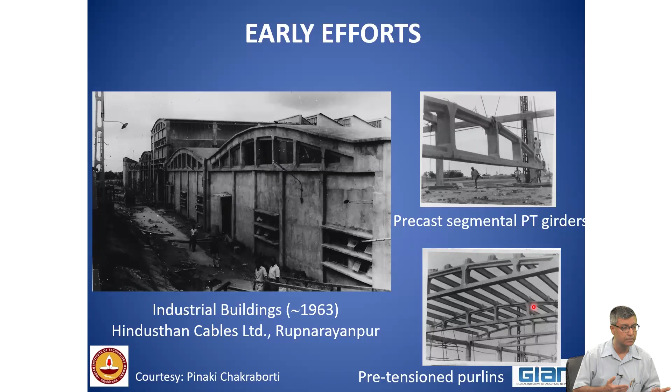Over these girders, they're providing purlins, and over the purlins, they're providing the roofing elements. When we teach civil engineering, especially structural design, we need to understand the load path. Where does the load primarily come from? For a gravity load design, it starts from the roof. Then how the load gets transferred, that means from the roof to the purlins, to the trusses, then to the columns. In fact, in your tutorial, this will be the question.

The Structural Engineering Research Center, which is in an adjacent campus to IIT Madras, also pioneered precast concrete for economically weaker section people. They have a mandate to make technology which is affordable for mass housing. These houses were near the fishing community, near the beach. Yes, it was not everything a success, because at that time there were some leakage problems.

And what happens in the fishing communities, they use a lot of water and they will wash everything, and that aggravated the deterioration of the leak proofness. Now, over the years, different sorts of chemicals and other types of caulking materials have been developed. The same thing, if it is done today, it will be done in a better way.

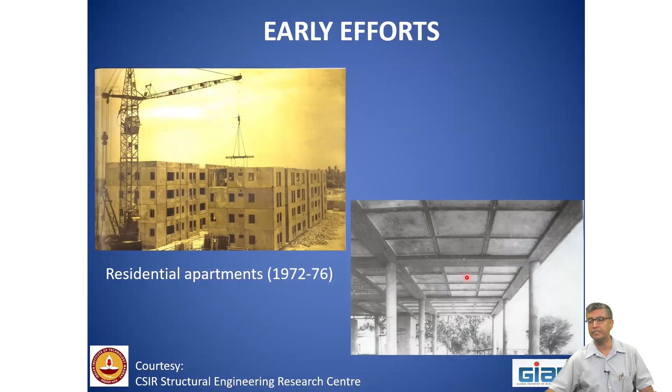Coming to the Indian pioneers, let me start with Baburao G. Shirke, who had established this company BG Shirke and Group, from where you will be having the speaker of the last day, Yogesh Kajale, one of the leading designers currently. Now, Baburao Shirke brought the technology called Siporex, and used it in mass housing. And BG Shirke has done pioneering work, not only in Mumbai, Pune, but in Gurgaon, in Chennai. I will be talking tomorrow about what the Shirke Group did in Chennai.

Shirish Patel established the firm Shirish Patel and Associates, where we had pioneering engineers like V.V. Nori. And this particular building, the Petit Hall, see the year 1973. And this building still stands in a coastal city of Mumbai. That means precast concrete can be durable, at least we are saying 50 years of lifetime.

After that, what happens is the functionality changes, the taste of the people changes, the society changes, and we don't expect buildings to be usable after 50 years. But at least for 50 years, we should guarantee that the precast building should be there without much durability issues.

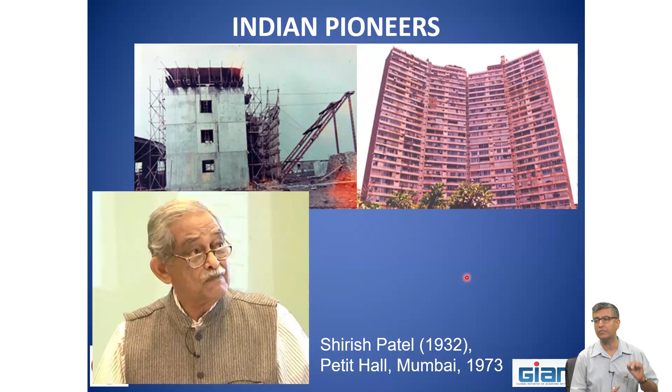Yesterday, Mr. Raghavan had mentioned about Dr. A. Ramakrishna. I was fortunate to have personal contact with him during the writing of this handbook, which he had championed. Dr. A. Ramakrishna's son, Professor Meher Prasad, is my senior colleague and a mentor.

Now, whatever you see in Larsen and Toubro today is because of a few pioneers, apart from Mr. Larsen and Mr. Toubro. And one of the Indian pioneers is Dr. Ramakrishna, and he had a single job throughout his life. What was that? L&T. They started from scratch and went on to make it the largest construction company in our country, which can compete with other international firms.

That's why I'm saying, those who are working with L&T, you are blessed to work in such a large firm, but try to have the spirit of giving back. Don't compare your salary with IT or data science type of jobs. You cannot compare. If today farmers say that I'm not getting salary, I will stop my job, who will feed us? That's why in our society we have to accept that we will be having different salaries. It cannot be uniform. The world is not a socialist platform. Let's be passionate with whatever we are doing.

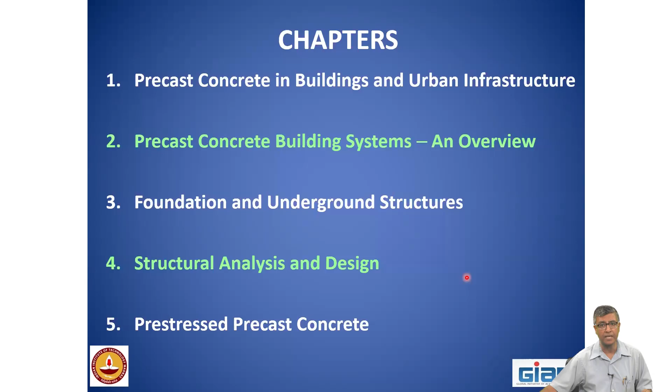Seismic design of precast structures - here also it does not teach seismic design from the basics, there are books for that. But here it's about how you can analyze a precast concrete building, that's what is covered.

The material properties are written in two chapters: one is properties of the material, another is the products. Even as academicians, you may think you don't want to meddle outside your classroom. No, please read company catalogs to understand the type of products the industry is offering, and make your students aware. The precast industry is an industrialized system, and we have to make our students aware of this.

Joints and connections, a very important chapter - we are calling Professor Jaya tomorrow to speak on this, so I will skip the details. Production, handling and erection - Professor Liberato will be talking about this.

Quality control and assurance - what are the specifics for precast concrete, I will mention that. Contracts and taxation - Mr. Raghavan has mentioned there are specialties in it, I will just briefly mention this, although in this course we are not covering them in detail.

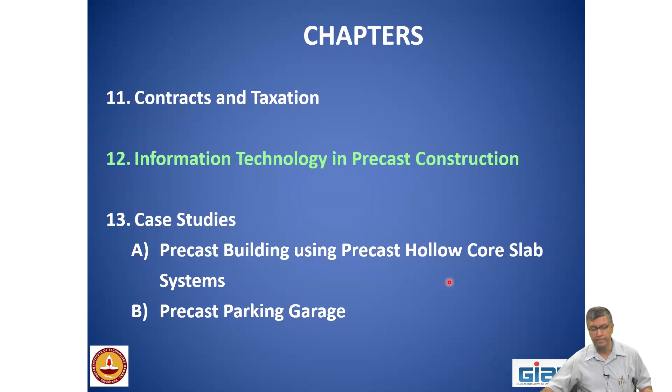And finally, there are two case studies where they have shown how the analysis was done briefly, how the construction was carried out, and what type of elements were selected. These are mentioned in these two case studies.

Now the authors: the first was written by Dr. A. Ramakrishna and Dr. Sivarama Sarma, both from L&T. The second one was written by me, which I will discuss tomorrow. The third one was written by Professor S.R. Gandhi, who retired as director of National Institute of Technology in Surat, and my colleague Professor Subhadeep Banerjee.

The fourth was written by Dr. Ramanjaneyulu, who was with Structural Engineering Research Center. The fifth one, you met him yesterday, Mr. Raghavan. The sixth one, Professor K.P. Jaya, whom you will be meeting tomorrow, and Professor Meher Prasad, my senior colleague whom I mentioned.

The chapter on joints and connections was written by Professor Jaya, and we are fortunate she will be coming. The ninth chapter on handling was written by Mr. Mohan Kumar from Rani Precast, though unfortunately he is not with us. Dr. Srinivasan from SERC wrote the chapter on quality control. Mr. Raghavan wrote the chapter on contracts and taxation. Mr. L. Chandrasekhar wrote the chapter on information technology, and Mr. Saladitya Shaha from Larsen & Toubro wrote the case studies. So whatever I'm presenting today is essentially their contribution.

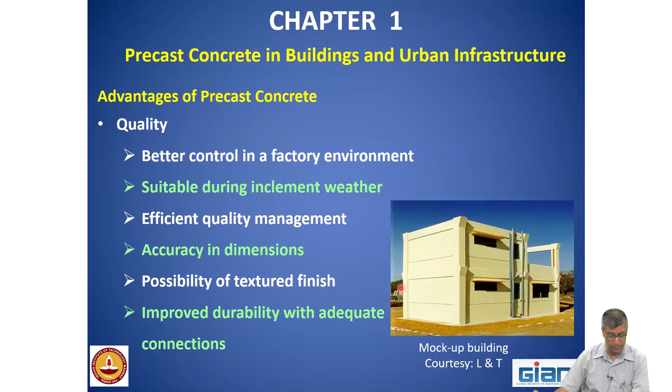The first chapter - some of these have been mentioned earlier. The way precast concrete has been promoted in this handbook is based on three main categories talked about in construction management. The first one is quality - factory-made products which can be produced even in inclement weather, efficient quality management, accuracy in dimensions, possibility of textured finish, which I will talk about tomorrow, and durability aspects. Next is time - we are talking of mass housing for our masses, and time is the premium, and precast is one of the options. Please note, I am not saying this is the only option. No way, there are other options also.

Which the government is promoting. In precast, we have rapid construction, provided we do the planning. There are certain prerequisites for the success of precast: use of mechanized ways, of course, meaning you have to purchase extruders and battery molds, suitable if it is modular and repetitive. One-off buildings are no point - no investor will be interested in that. And there can be parallel activities going on. That means when the foundation is being made, typically cast in place, at that time the superstructure elements can be produced in the factory.

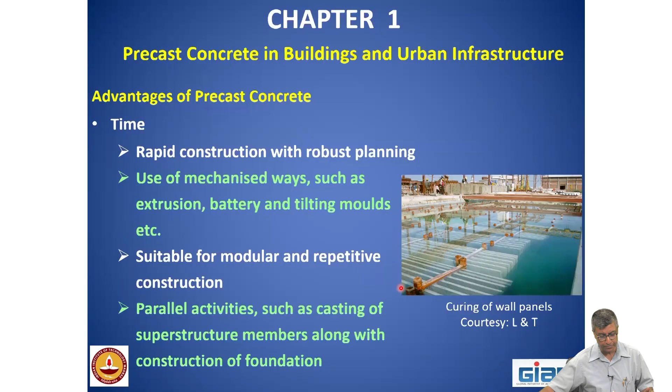Now, what are the miscellaneous advantages? Today we are talking of greener buildings. My friend and colleague Dr. Sivakumar works on the computational aspects of what is called green, and he can tell us how we can qualify the statement that precast is a greener solution than conventional cast-in-place construction.

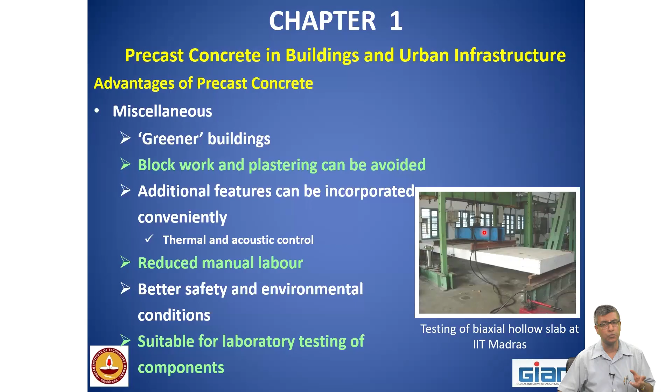Better safety and environmental conditions, and suitable for laboratory testing. This is in our lab - we tested what is called biaxial voided slabs, the proprietary name was Cobiax, a type of slab where they introduce plastic spheres to reduce the weight. I'll be talking about it tomorrow.

Now, what are the challenges? Does everything look positive? No. First is the initial high cost of setting up factories - we are talking of an industry, and hence initial investment is necessary.

Teemage, who financed it? It's the Chennai Silks.

Those type of companies have to come up to help us.

High transportation costs for delivery of precast components, given our road conditions, is a challenge. Unless we have precast factories throughout the nation, you cannot say that I will transport.

Even in our building, whichever you will be seeing, the sports complex built by Teemage, getting the products from, I think, Coimbatore, the Tirupur factory, was a challenge. And of course now they have established a factory in Kanchipuram to meet the Chennai requirements. The erection of the components needs special types of cranes, and there's the excise duty issue.

Mr. Raghavan mentioned that in our country we have a special clause which inhibits the precast manufacturers. I'll be briefly talking about that today.

And we need modular design with repeatability. That means even the architects have to be familiar with how to design for using precast concrete. They cannot come up with something and then leave it to the structural designer to figure out how to make it precast. No, yesterday Mr. Raghavan rightly said it has to be an integrated approach.

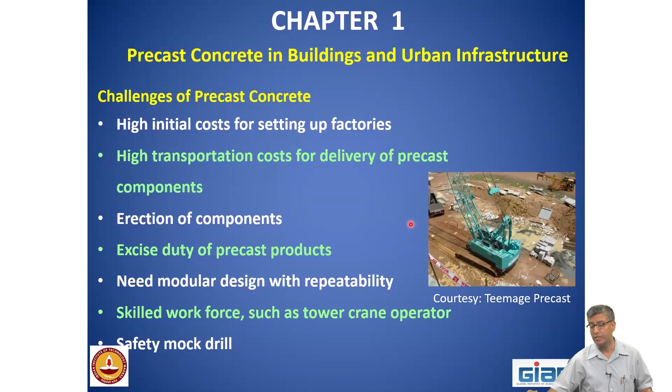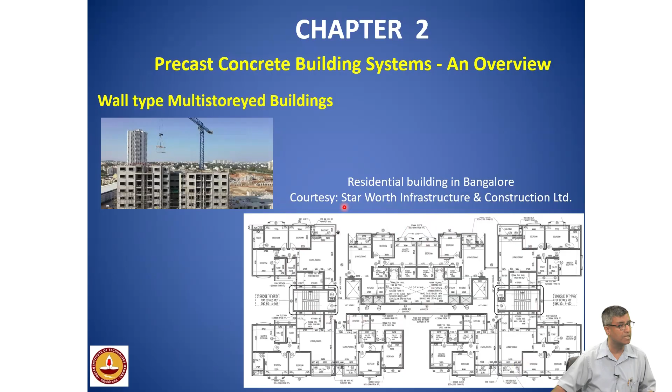Coming to the second chapter, I'm just briefly touching upon this. In this chapter we are talking primarily of two types of precast systems. The one is a wall type, where you make wall panels, maybe with window openings. You see that this particular plan, the way the architect has conceived, he or she had kept in mind this repeatability or the modular concept. That is necessary, and this is coming from a very famous company, the Star Worth Infrastructure and Construction Limited. I talked about Mr. Raj Pillai, who is involved with this.

The other type is the frame construction. Each one has their benefits and domain of usability - I will be talking about that tomorrow. In the frame construction you are having beams and columns, and accordingly your building plan is also different. However, you can also have a mixed type, that means within a frame type building you can have panel type elements.

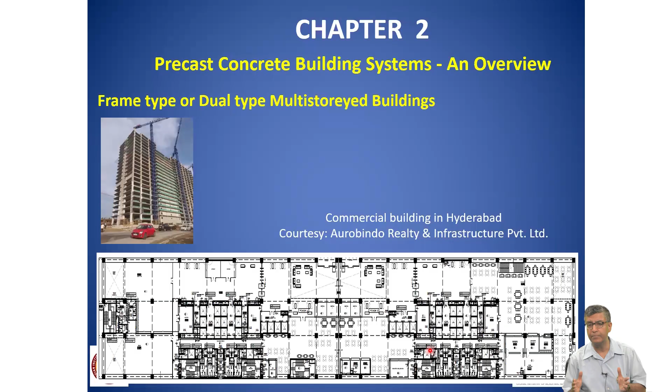The foundation and underground structures - in the foundation we have additional advantages of precast concrete. First, that we can backfill the soil very fast. In our country, we have this monsoon season in many parts, and at that time construction is invariably affected. Using precast is a solution that lets you still continuously do the construction.

Curing is not required on the site, and it is also suitable for fluctuating groundwater table. In a coastal city like Chennai, where our groundwater highly fluctuates - come December, it is almost at the ground level after the rains, and come say April or May, it is substantially below. Now these are the challenges in the construction of foundations.

You can ensure high grade and quality of the concrete. For pile construction, the bentonite slurry can be an issue regarding disposal and contamination of the concrete. That can be avoided if I am using precast piles. And there's no necking or bulging of the piles, which can happen if I am using conventional cast in place piles.

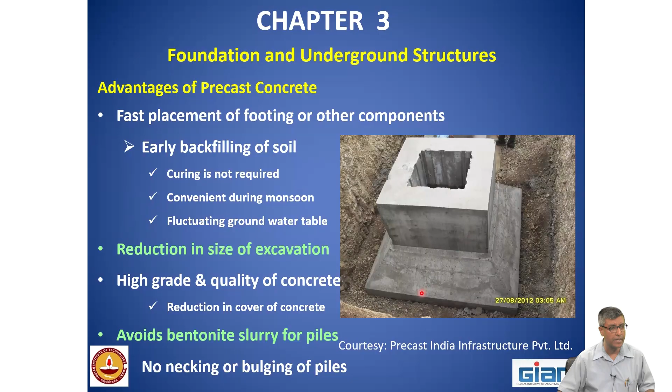This particular photograph is from Precast India Infrastructure Private Limited, Pune based, and Kapilesh Bhate, a very good friend of mine, will be coming on the last day to speak about his company. On the photograph on the left, this I had taken when I visited the factory in Tirupur, Teemage.

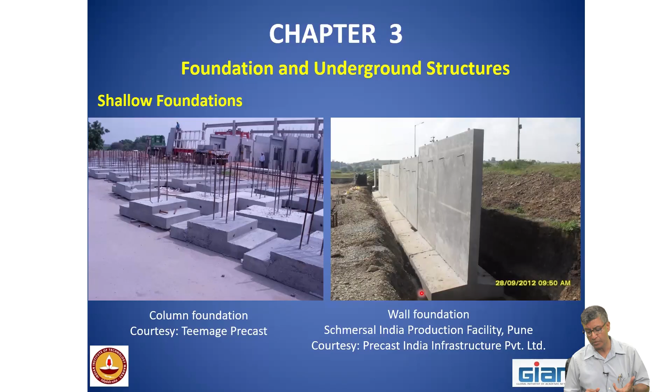That these are the way we teach foundations - shallow foundations and then deep foundations. Similarly here also in this chapter, that's the way it is written. The first is the shallow foundation, which are for columns, pad foundations, or it can be for even walls like boundary walls. And the other group is the deep foundations.

What is meant by that? Pre-tensioning, Mr. Liberato will be covering. Spun means it's like a hemispherical mold where you put the concrete, then put the cover to make a complete circle, and spin it very fast. That spinning does the compaction, so it's not like using a vibrator to compact it. This compaction provides much denser concrete, and that's why these are called pre-tensioned spun piles.

Similar technology is also used for electric poles and masts, which you will be seeing outside.

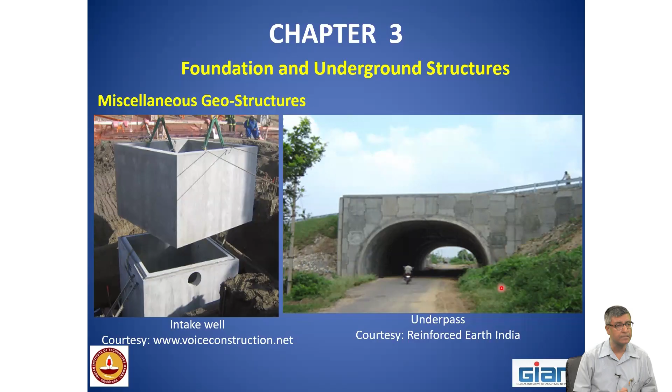These are mostly used for grade separators, and you just go outside our campus, you will see that. On the left, we see the reinforced earth wall of the Kanaka Durga temple in Vijayawada. Our retired faculty, Professor K. Rajagopal, was highly involved with this. I had got an opportunity to work with him while testing these fascia blocks, to see how you can use the geogrid anchors for these fascia blocks.

On the right side, yesterday Professor Liberato talked about these tunnel liners, and here you can see this. This is the inside of the tunnel that has been made in Chennai and similar other places.

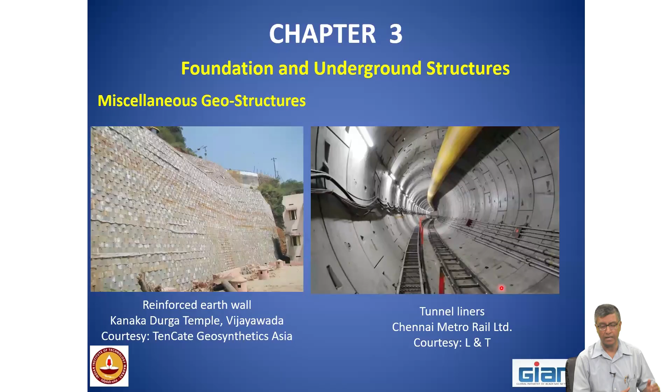We went to see the factory which is producing this. It's a pretty high-end factory, and we took our students there. Production is done by Larsen and Toubro, and it's like a huge factory with assembly line type of processing. On the left side is an overall view, and on the right side you can see the molds.

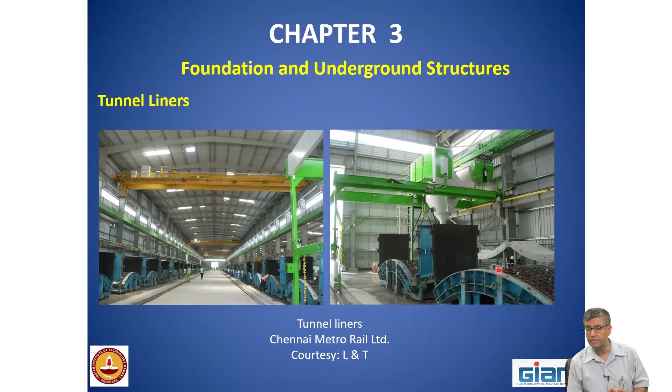Each of this can be a seminar by itself. I'm not a specialist in this; it's a very specialized area, how do you analyze the tunnel liners and then how do you design for it.

Coming to the structural analysis and design, whenever we do a building analysis using a computer, we have to be aware that we have to use appropriate finite element modeling. Otherwise, junk input will give junk output.

First, the selection of elements: frame elements for the beams and columns. Here, we are not teaching finite element method, it's just raising awareness. Membrane or shell elements for the wall panels, plate elements for the slabs, and strut elements for infill walls to measure their axial compression resistance.

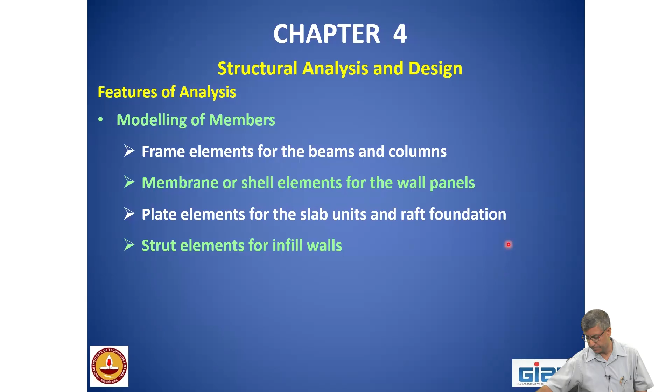Then the main challenge comes in the connections. When we teach reinforced concrete, in the first class we say, what is a frame? A frame consists of beams and columns which are rigidly connected. What is meant by rigidly connected? That the angle between the beams and columns at the junction will stay 90 degrees even under load, whether gravity or lateral. That's the way we start frames.

But my friends, in precast, this basic notion may not be there, and hence that should be taken care of in the analysis. Otherwise, things can go wrong.

Now, there are two types of joints and connections. This terminology is a bit confusing. The way I view it is, traditionally in reinforced concrete we talked about joints, beam to column joints, slab to beam joints, which are the overall junction region. But now we are moving more towards structural steel type applications, where they use the word connections, beam to column connections. So the overall junction we can call joints, but the detailing is actually connections, because we are trying to mimic the way they do it in structural steel.

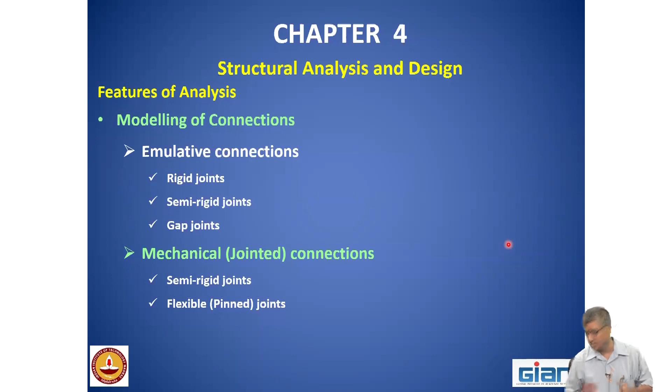Now, let's try to understand the difference in the behavior of a cast-in-place conventional versus a precast with pin connection. So on the left, if I have the gravity load and we are assuming rigid joints, how does the resistance come? Where are our BTech friends?

Today BTech friends are not there, they were sitting yesterday here. Okay, no, do not go back, you should come front. Okay, today this is empty. Okay, tell me, how does the frame resist the load? Primary load is the gravity load, which is there every second. Okay, since you're sitting back, I will not ask it.

The beam tries to bend. While it's trying to bend, due to the rigidity of the joint, it also tells to the column, hey, help me. And then the column also starts flexing. And like that, the load gets transferred gradually to the foundation.

And if you look into the bending moment diagram, the beam is trying to bend. If it is simply supported, it will just bend with positive bending, since gravity load is always downwards. But due to the rigidity of the connection, we tend to have hogging moment coming up near the beam column joints, and that due to joint equilibrium gets transferred to the columns. And this is the bending moment diagram. I will ask you this diagram tomorrow in the tutorial - please note it, you have to draw it for a typical case.

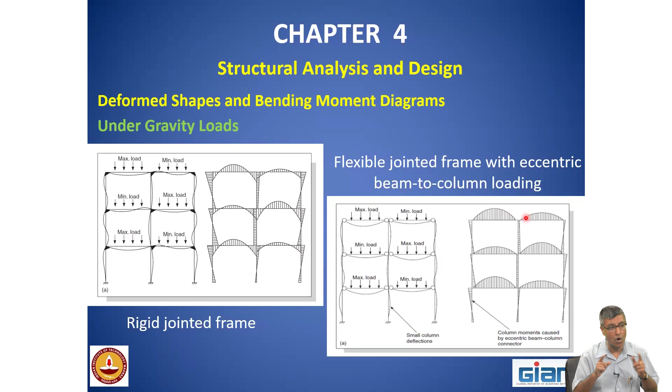The same construction, if I now look under lateral loads - for a cast-in-place construction, we tend to have an inflection point somewhere near the middle of a member. Based on the inflection point, one side of a beam will be sagging, the other side will be hogging. And in the columns also, at least in the upper stories, the inflection points are more or less in the center, and there also there is a change in curvature where tension is on one side at the top and tension will be on the other side at the bottom.

And if I look into the precast construction, which Professor Liberato was talking about yesterday, we have to ensure fixity at the bottom of the columns, which may be difficult under high gravity loads and high lateral loads. Now the columns have to be like vertical cantilevers because we are not getting the rigidity from the frame. Hence, now you see the bending moments in the columns - this is quite different from what we see in cast-in-place construction. And the beams are essentially free of moment under lateral loads alone.

Coming to the types of structural analysis, depending upon the level of sophistication, we can classify that most of the time our practicing engineers will be adopting linear analysis - linear means material linearity, where stress is proportional to strain. And for earthquake we adopt a static analysis, which our code 1893 specifies. I will be discussing 1893 in the next week.

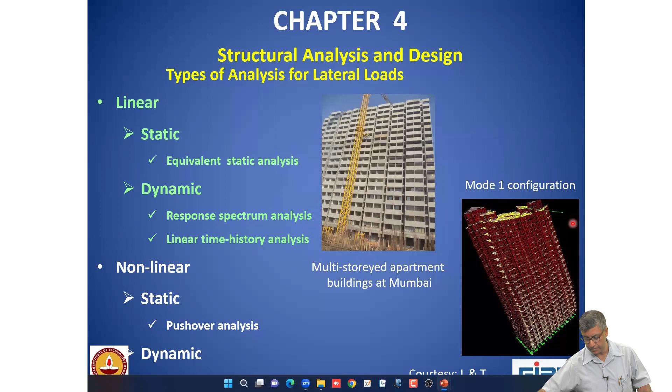Coming to the pre-stressed applications of precast concrete. Why do we go for pre-stressing?

This is more or less, these advantages are same as cast in place, that we can get high span to depth ratios. Larger spans means increased column free spaces, which is a requirement for auditoriums. We did one project for IIT Palakkad, and in their auditorium they had to go for pre-stressed members.

That was of course not precast, but without pre-stressing they could not have gone that high span. Otherwise, these beams will become very ugly and the self weight will increase. Reduced member sizes, once we are able to, this is the corollary, that we can go for a lighter weight.

Because pre-stressing is counteracting the gravity loads. Less material consumption with precast, and once we are able to reduce the weight of the members, obviously for a large construction, we will be having a benefit in the seismic design, including the design of the foundations.

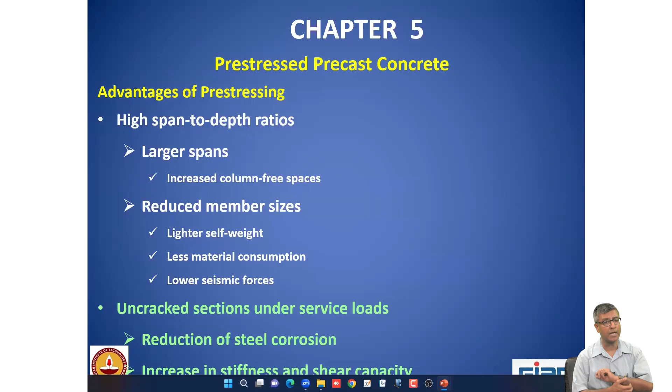Another benefit we get for pre-stressing is the durability. Apart from the structural design, the durability. This is very important, even more for bridges, that the uncracked sections can lead to much better durability, and it also increases the shear capacity and the stiffness if we are going for pre-stressing.

Now, this is the type of factory we are expecting to see on Saturday. This is from Teemage, of course in the Tirupur factory, showing how they are producing these hollow core slabs.

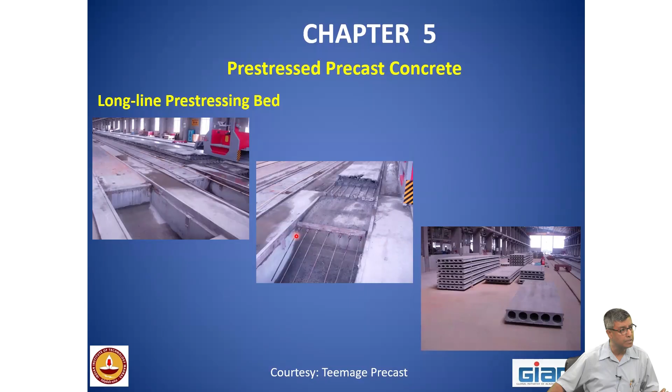It's an assembly line process, which is a pre-tension bed. You anchor the strands on one side, stretch it from the other side, pour the concrete. You can see this long line, and this is the anchored side. Once you pour the concrete, then you have to extrude to give these voids.

And this is the final product you see. Now, typically their properties will be given in the catalogs. Each company has their own standard, depending upon the type of machinery they're using.

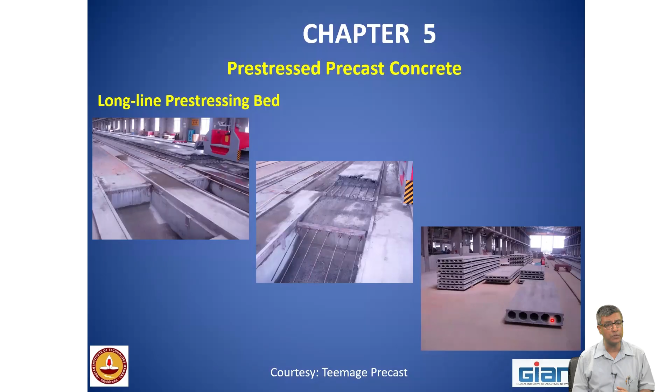And this is another factory which I saw in Pune from the Precast India group, which Kapilesh will be talking about. And you can see what a mega scale precasting is going on.

Please try to, in a field visit, observe the way these machines work. These extruding machines have different types of fixtures, and based on the fixtures, you can have different types of voids, depending upon the spans.

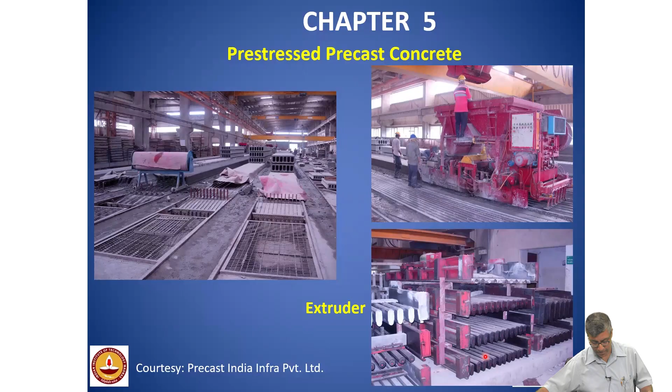Now, in our campus also, I would strongly suggest that please visit the ocean engineering. Maybe our teaching assistants, our students will help you. Maybe even our students also may not have seen this. In our ocean engineering, we have a wave basin which was built way back, I think in the late 70s or maybe early 80s.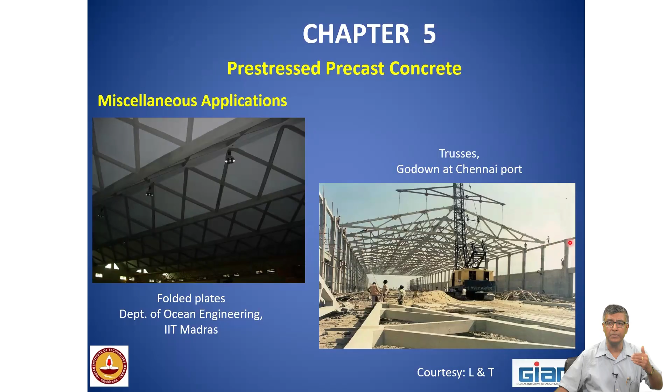Coming to the seismic design of precast structures. This is an aspect which is definitely challenging, because whenever we go for a jointed system, we are inviting trouble.

There have been failures in India during the Bhuj earthquake, where school buildings collapsed because the seating was not proper. Luckily, it was on 26th January, so the children were not there inside. That's why in these school buildings there were no casualties. Otherwise, it could have been dangerous. But it's not only India.

If you look into the Kocaeli earthquake in Turkey, there was a lot of damage in precast buildings. This is one thing where our designers have to come up with innovative solutions.

Why are the failures? Because of inadequate detailing. Primarily, it is the detailing, inadequate seating and diaphragm action. I will be talking about the diaphragm action again tomorrow. Also inadequate deformation compatibility between the different components, since some are more flexible and some are rigid.

Also inadequate separation of non-structural elements. Now, these are written in qualitative statements, but these are very difficult to actually design.

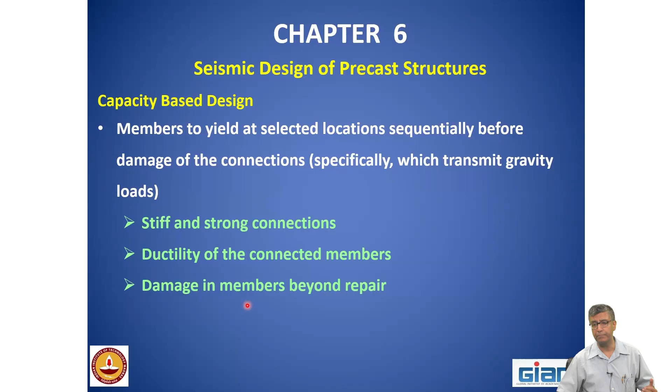On the contrary, there is another philosophy which is just the other way around. There he says, wait, you are now saying that things cannot be repaired. Let me come up with a solution which can be repaired. How to do it? We go for a design called resilient design.

Here, a joint yields before the members. It's a control, like a fuse which you can change - meaning these are deformable and ductile joints. Joints can be repaired, and the damage in the members is limited, so hopefully they can be repaired. This type of design is yet to come in our country, but we hope it will come.

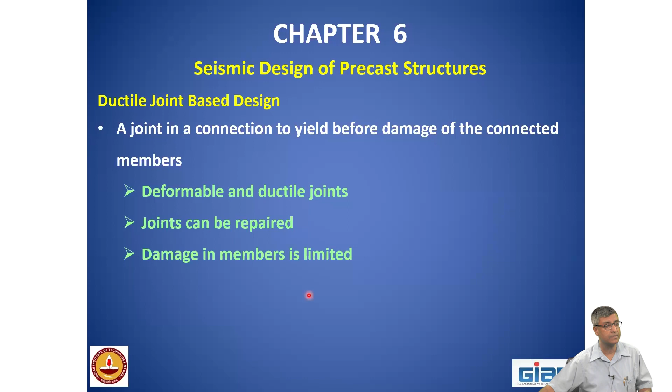Now, whenever you do the analysis, we are focusing primarily on the seismic aspect, and I had talked about this in the analysis chapter. We should be able to understand the behavior of an emulative connection versus a mechanical connection.

In the emulative connection, there is transfer of moments from the beams to the columns and vice versa, back and forth. This is the typical type of connection adopted in our country, where you have cast-in-place concrete at the junction to ensure that we indeed have an emulative connection - meaning indeed we are having a rigid connection. That's why we need cast-in-place concrete around the junctions.

On the contrary, if it is mechanical, then the transfer of moment is not like that. You have to understand it can be made semi-rigid by putting some sort of pins or angles. I believe Professor Jaya will be speaking more on that.

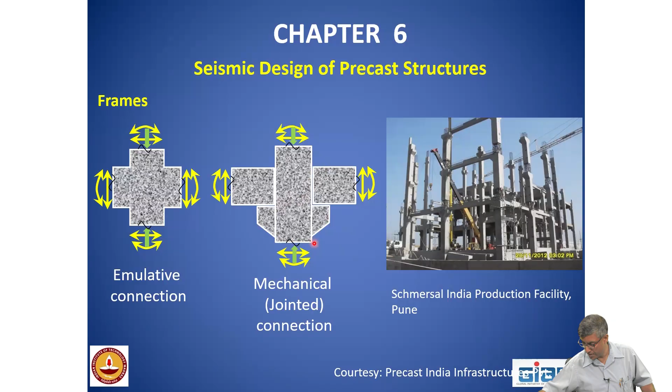Coming to walls, the way they are connected in our country, we tend to have some loops coming from the two adjacent walls, place a rod and grout it. It appears emulative, but it's not - they are going to crack. Hence the designers typically consider them as gaps, as if the stack of walls are just carrying the load by side, individually, rather than together.

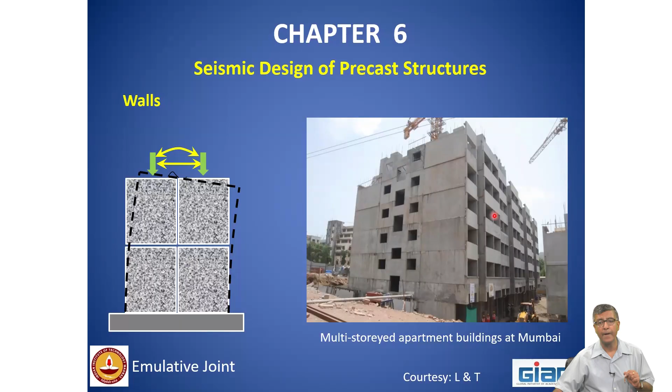Even in this particular project, Larsen & Toubro had adopted these gap joints because we cannot ensure rigidity in that type of connection. A third type, which is coming up from the university side, and this is the innovation we are talking about, is called design which is based on energy dissipation and self-recentering.

Now, what is meant by that? In an earthquake, it's a matter of 40 seconds to a minute. If I'm able to sustain that without the collapse of the building, by that itself we will be able to save lives. What happened in Bangkok or in Myanmar is an eye-opener that the same can happen in any of our big cities.

Now, this particular concept aims to reduce the drift and eliminate damage of the members. Here, there are joints which are made such that they open up and close with certain dissipating elements in between, which will help to sustain that vibration, avoid uncontrolled cracking, and there are inserts of mild steel across these joints. Also, there can be unbonded post-tensioning, which gives this self-centering effect.

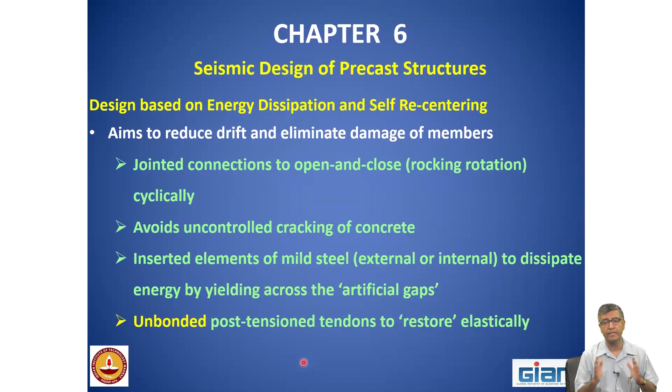Let's try to understand this in a schematic sketch. Here, this is a beam column joint.

In the US, typically what happens is they don't like the corbels. They say that's an extra part of the formwork which creates trouble. We will not have corbels; we will be supporting the members temporarily during erection. Then there will be this post-tensioning strand which will go from end to end, and then they will stretch it and lock it.

And in between, these red lines also are provided, that is mild steel, which is the energy dissipating component. The strands cannot yield. If the strand starts yielding, then you lose the self-centering capability.

And this is the way it tries to behave, it is called a rocking joint. That means now you have deliberately kept the joint to open up and close. While it is opening up, the mild steel rods are yielding, and hence they're dissipating energy.

On the right side, this I got from Professor Stefano Pampanin, who was in New Zealand. Now he has moved back to Italy. This type of energy dissipating, external energy dissipating elements can also be provided in this parking garage type of structures.

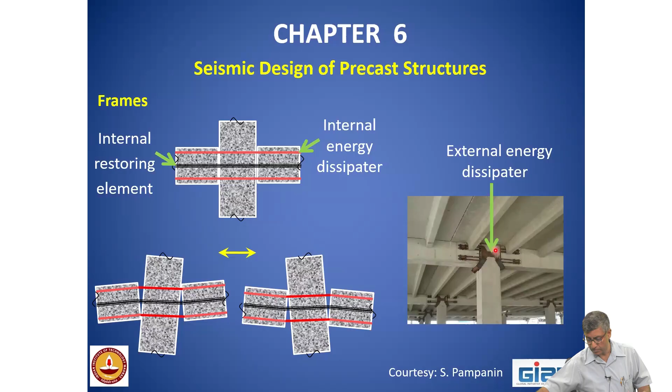Coming to the diaphragms. Now, what is meant by a diaphragm? Yesterday, Professor Liberato had already mentioned this, that during an earthquake, the load is an inertial effect. It is the heaviest component of the building which generates this inertial effect, and the heaviest components are the slabs.

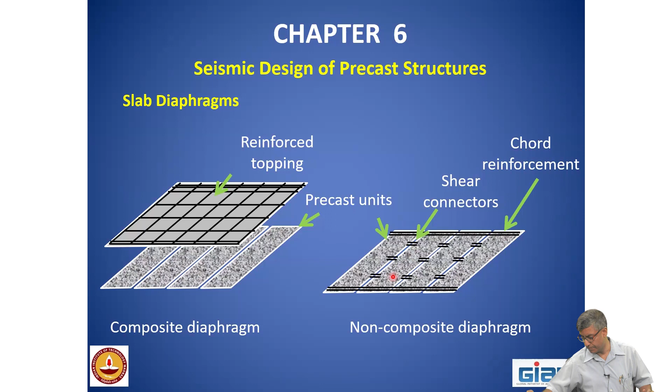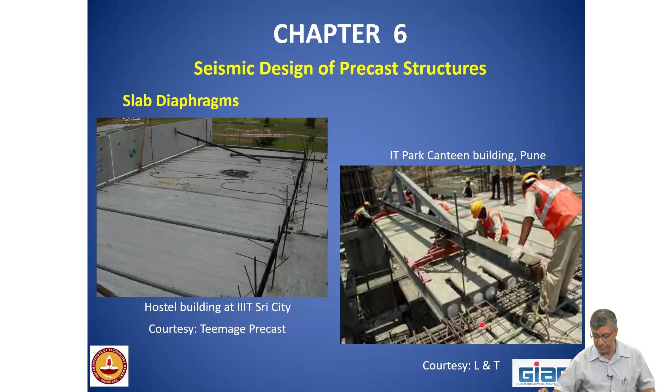Coming to material properties, I had already talked about the authors. The materials used are more or less known from our undergraduate concrete technology course: cements, supplementary cementitious materials, aggregates, chemical admixtures, reinforcing bars, pre-stressing tendons. However, these days there are multiple types of usage and design, and we have to be aware which one is suitable for what. We are going for terms like high performance concrete, ultra high performance concrete, fiber reinforced concrete. This needs substantial knowledge in concrete technology to address this type of variance.

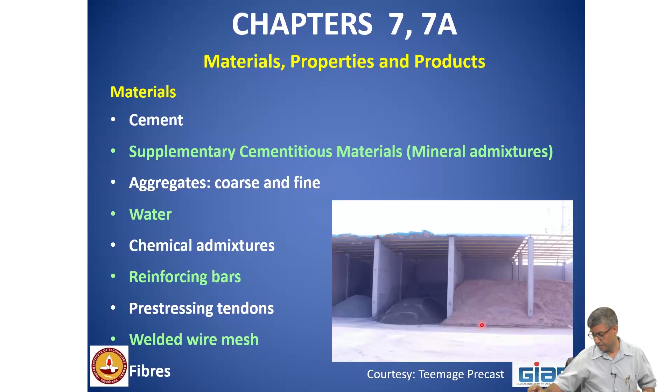Gone are the days of just 1:2:4 type concepts - those are not there, or at least should not be encouraged.

In the precast industry, if you are industrializing the process, the requirement is to have high early strength so that you can release the molds, very similar to what happens in a pre-tension member. Whether you pre-tension or not, you need high early strength - about 10 megapascal in 10 to 15 hours. We expect durability, and there can be miscellaneous requirements based on application: high flow mix or flowable concrete, or the contrary, a stiff mix - all can be done. We can introduce color, texture, make it lightweight, and there can be thermal, acoustic insulation, and fire endurance. That means different types of mixes are possible.

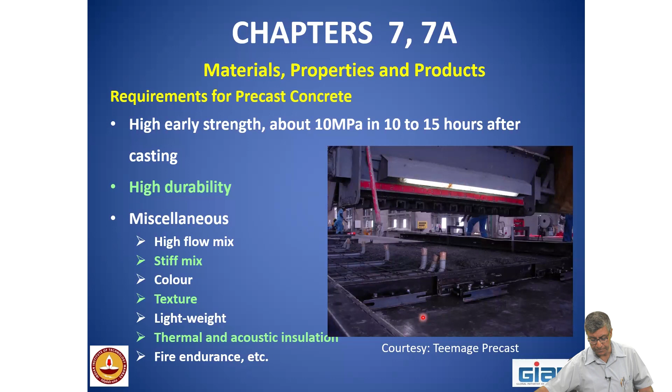Coming to joints and connections, I had mentioned that broadly we classify joints into two types: emulative and mechanical, sometimes called wet and dry. In this chapter, it's highlighted that there can be numerous types of joints in precast construction, because we are deliberately going for a jointed system. For slabs - slab to slab, slab to beam, slab to wall, slab to column, if it's a flat slab type construction - each joint has to be taught and learned.

It's a huge task ahead of us, the educators, to make precast concrete a subject that has to be taught. Coming to beam elements: beam to beam, beam to wall, beam to column. Column elements: column to column, column to foundation or footing. Wall elements: wall to wall, wall to footing. Besides this, we also have facade elements and miscellaneous elements.

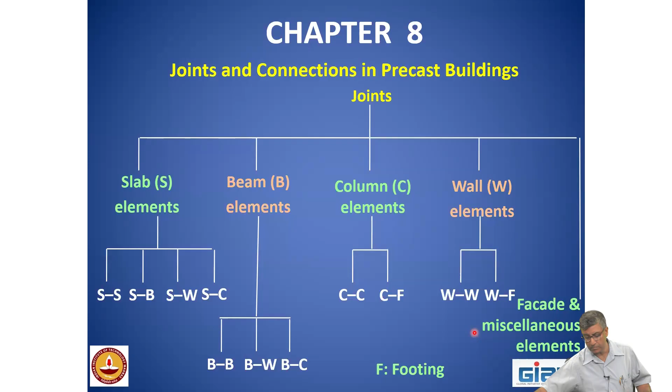Now you can see the classification of joints in terms of what members are being connected - so many different types. This classification, as I told before: the emulative connection uses on-site concreting to mimic cast-in-place construction. On the other hand, these are the mechanical type of brackets which can be used. However, again, durability is an aspect we have to think of.

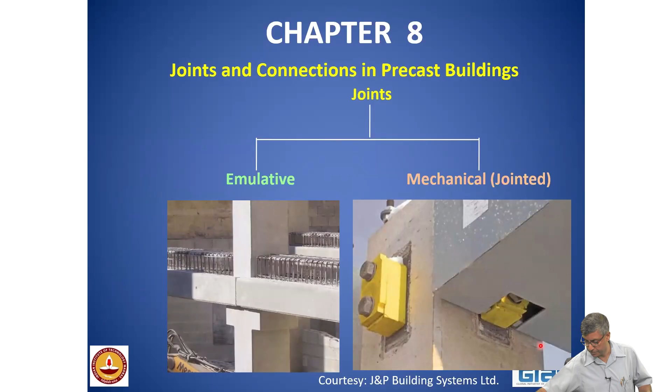The emulative connections mimic cast-in-place based concreting, and are expected to be corrosion resistant, provided the concreting on site is good - though this is somewhere again we have loopholes. Quality control is required at site, and behavior is expected, within quotes, to be monolithic, provided it is designed properly. However, it requires inserts of reinforcing bars, dowel bars, and some connectors. We'll be talking about this tomorrow.

On the contrary, the mechanical joints, mimicking steel connections which are mostly based on mechanical components, need protection against seepage and corrosion. That means we have to have durable caulking material. Quality control in tolerance is required at the machine shop as well as the casting yard. This is something only a company person can properly talk about, regarding what type of tolerance issues you're facing. The behavior can be anywhere between rigid, semi-rigid, flexible, or even we can have dissipative joints. This also requires different sorts of inserts, and detailing this can be a task.

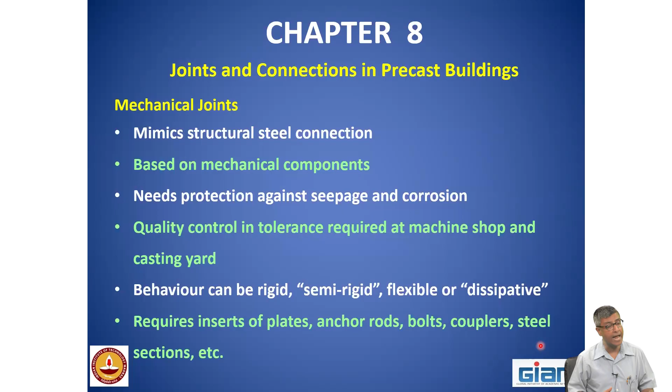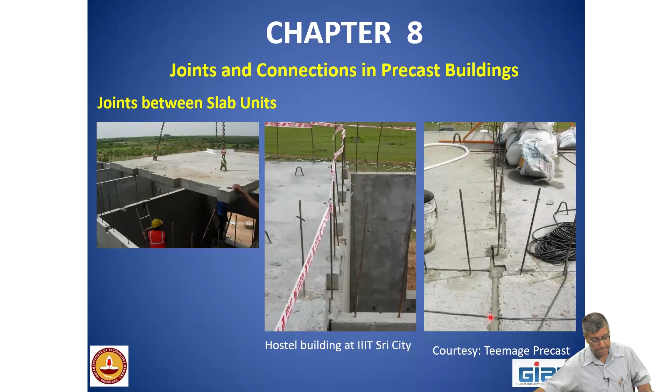Now these are certain drawings which I picked up from the industry, showing how they go about it, and these are the types of stitching they do. I will skip the details. Most of it can be understood, that between the wall elements, this is one connection where it's more like an emulative type of connection.

There are horizontal loops coming from the wall elements in the vertical joints, and this is a plan, please note. Then we put a rod inside, and the inside space is grouted with non-shrink grout. If the space is large, then we can have an inserted column, meaning you have reinforcement inside and then you pour concrete.

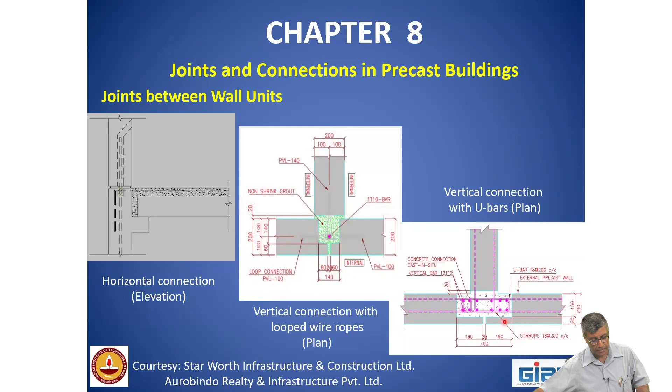This is a connection of the slabs to the supporting beams. Again, you can just have a look through them. This is from beam to column, showing how they put some inserts to check the loss of seating. Column to column splicing - there are different types depending upon the company.

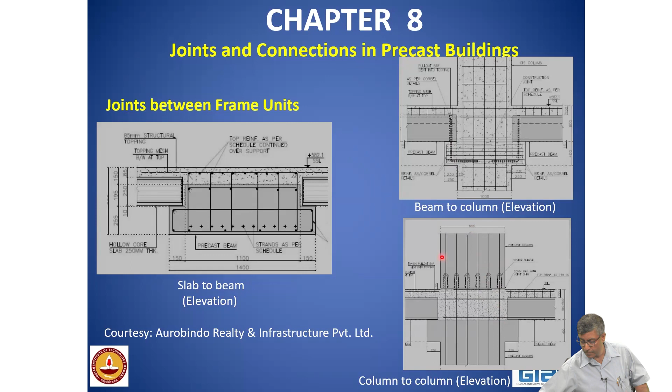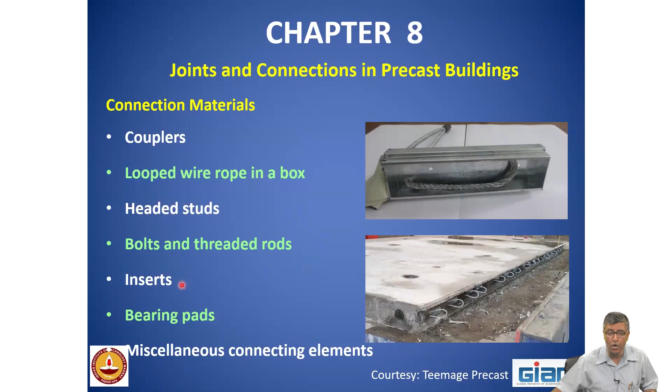The connection materials - these are called looped wire ropes, and they come in boxes. In our country we typically get them from China or companies like Peikko, who are also sending them to us. These loops are placed inside along the vertical edge of a wall panel. They are flexible, so when the panel is being lowered down, they can bend, and there is not much obstruction. Once they are in place, the loops are opened up, the loops from the two sides are overlapped, and then you place the rod inside. Apart from this, there can be headed studs, bolts, inserts, and as I said, bearing pads is also very important. Sometimes we tend to skip bearing pads - that is not good, because then you're having direct contact of concrete to concrete.

The production, handling, and erection of precast elements. Now the production process - unless you visit a factory, you don't understand what is meant by this industrial production of precast members. In this photograph you can see these are the wall members with plastic ducts inserted, through which, when the wall members are placed vertically, the dowel bars will go through these plastic ducts. There can be different types of molds for the column, beams, walls, slabs, stairs - each component has its own type of mold.

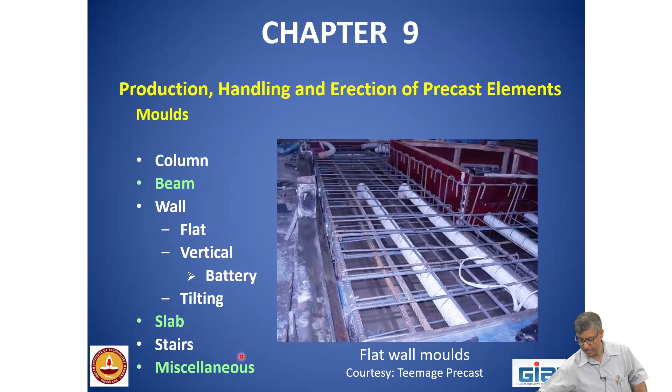Coming to pre-stressing, again you need to understand the way pre-stressing operates. It means in the industry you tend to be specialized in whatever you're doing, and understanding the losses - immediate losses, long-term losses - these are all necessary if you are introducing precast. You can have the hollow core slabs and even beams, piles.

In terms of the way the factory is laid out, the carousel line, which is like an assembly line used in car manufacturing, a similar type of thing has come in the precast industry. This is the factory I saw, with lots of automation - meaning gone are the days that people are carrying buckets of concrete and pouring.

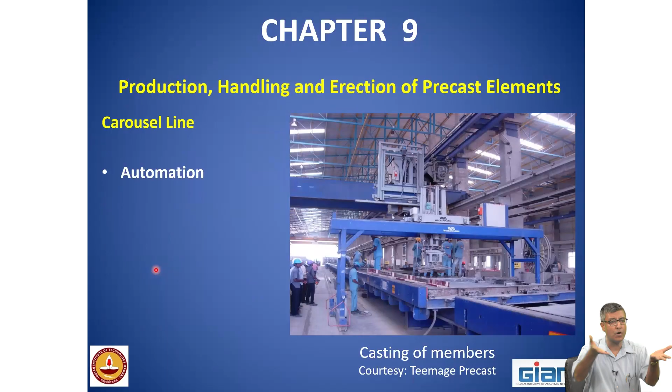Now this is not of a building, this is railway sleepers, but I was impressed by this factory in the Patil Rail Infrastructure in Tirumangalam. And here you can see that for the

construction crew, they have kept this flow chart so that these procedures are followed step by step: the preparation of the mold, fixing of the inserts, and so on. I'm not going through this, but I teach this in my pre-stressed course, that these are the steps you

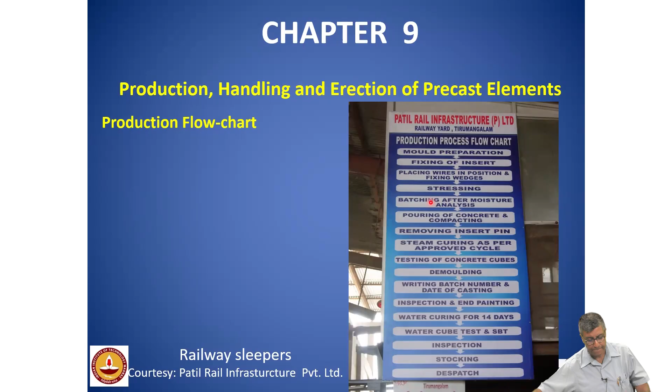have to follow when you are trying to produce this type of member. Curing, demolding. This is from a bridge site, undertaken by the Airport Authority of India Limited for the Chennai runway extension project. Here you can see that they went for steam curing, and then this is being demolded.

You can understand there are handling stresses, and then subsequently, after steam curing for 24 hours, which is considered equivalent to 7 days of curing, they again do moist curing.

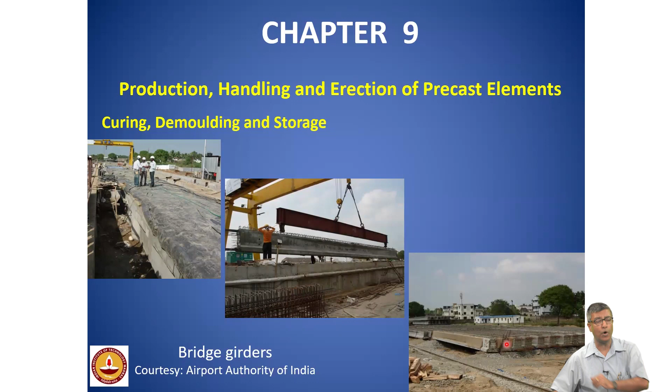Transportation, handling, and erection - these are construction equipment related topics. I am not the person to speak about this. This is a topic by itself.

These type of topics I would strongly suggest to educators, please introduce at your undergraduate level. The complaint is, once students go to industry, they say these teachers taught what they knew, but did not teach what we need. This is a common problem. So we as teachers have a responsibility at least to introduce these topics, so that once they go to industry they

can pick up quicker - what type of trailers are being used, what type of cranes are being used. This is photographs we took at our Sri City project.

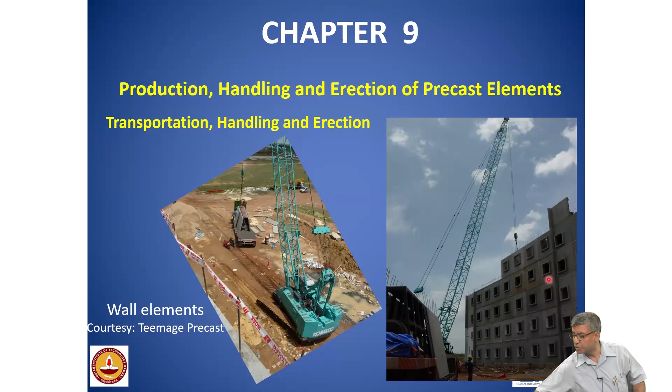How are the precast elements lifted? These photographs I have taken from the handbook.

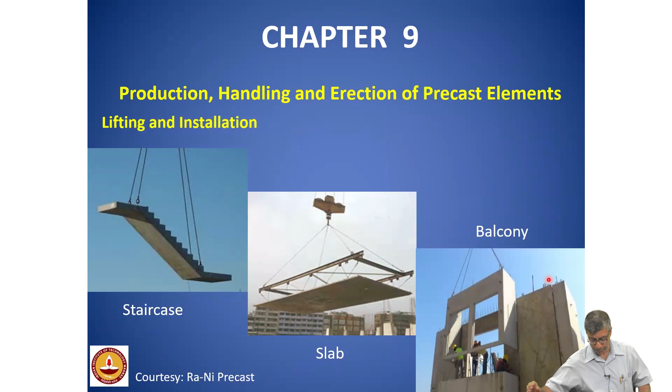Coming to quality control and assurance. Now there are already certain codes in our country. The first one is under revision, and Professor Pillai is chairing that committee - IS 15916, which is building design and erection using prefabricated concrete. The second one, IS 15917, is related to mixed or composite construction. And there is an overall guideline, which is the ISO 9001.

Now, the purpose of awareness of these codes is that sometimes our engineers are not aware that these codes exist or that revisions are coming out. That is dangerous. So at least in the handbook we have highlighted that these exist and you should follow this.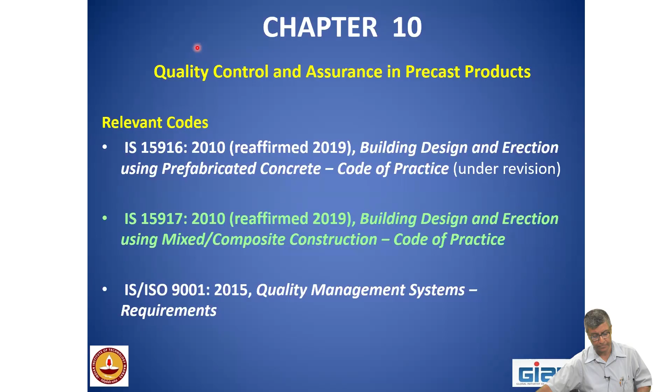Now, the quality control under this industrialized process comes under different stages. First, the quality of the materials - for that itself, each of these materials have their own set of tests.

Next is the quality of the processes - how, whenever you are manufacturing them, what are the quality checks. Again, I am skipping reading the details.

Qualities on the finished product. Once you have made the products, some of them are tested. Sampling is done. What type of tests are to be adopted? And then if there are repairs, if there is some damage, then again what type of test is to be done - do you want to demolish that or can you repair it?

On the contrary, for the railway sleepers, it's a mandate from the Indian Railways that they have to be checked at least for serviceability as well as the ultimate state and also fatigue loading. In our lab, we have the fatigue testing facility where we get sleepers not only from the Indian Railways but from neighboring countries to get them certified.

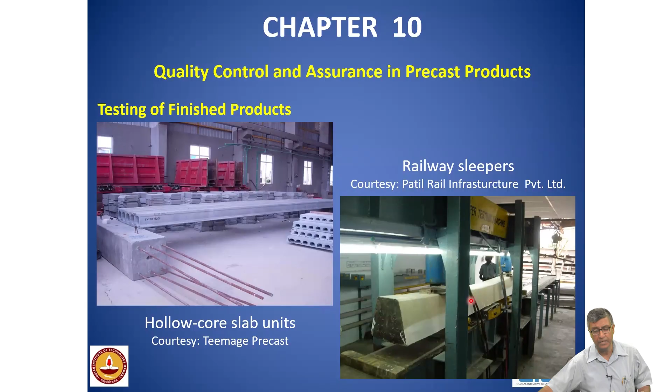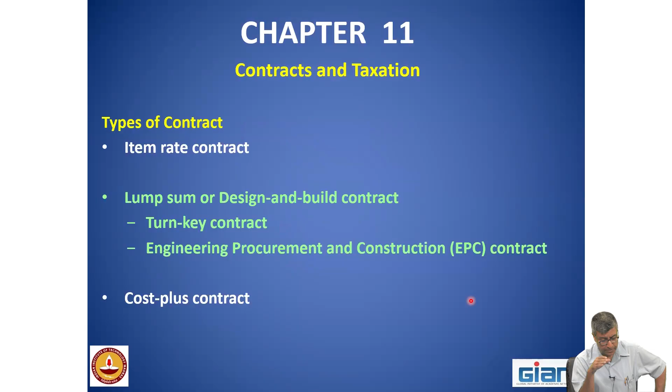Coming to contracts and taxation. Now, in this chapter of the handbook, first the different types of contracts are mentioned - which one is suitable for precast. These are referred to: item rate contract, lump sum contract, cost plus contract, target value design, integrated project delivery.

I am not the person to answer this, but in case you want to know more about it, you can write to Professor Raghavan, who was in the industry dealing with all these types of contracts.

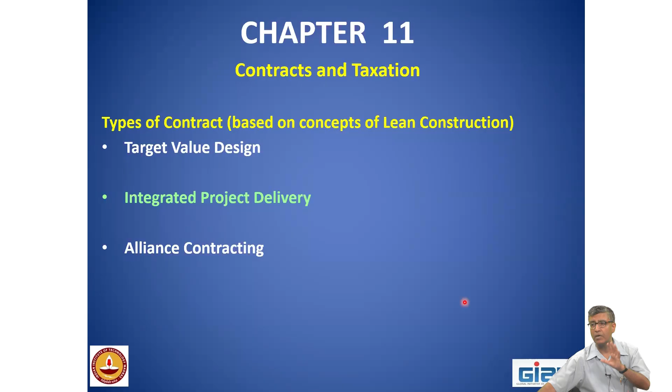Now, the problem in precast construction being popular in our country is that there is some excise duty, because it is considered to be an industrial product. Once you have this excise duty, it inhibits the precast manufacturers, because that reduces the profit margin. How to tackle that situation? That's more of an administrative purpose, that in order to promote precast, these types of excise duties should be reduced.

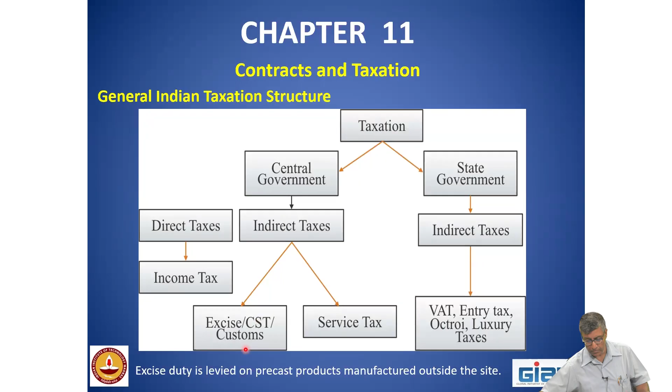Now, whenever you write a contract for a project utilizing precast construction, it is not that you just copy paste whatever happens in cast-in-place. No, there are certain subtleties mentioned in this chapter which I will skip reading, that the conditions of the contract, special technical specifications are necessary for precast construction, and the taxation aspect should also be mentioned.

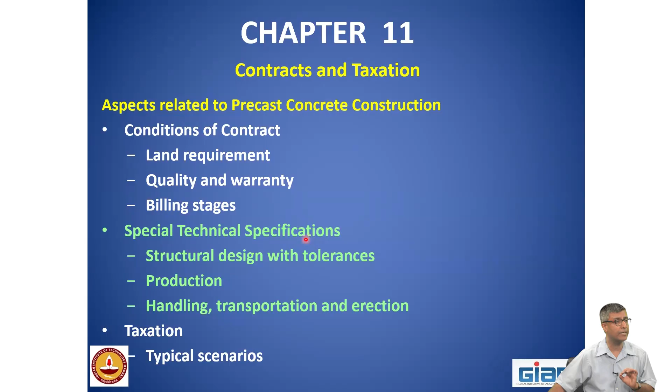Information technology in precast concrete. Building information modeling is a tool by which you can visualize a project a priori. Larsen & Toubro has a huge facility with a walk-through type of facility. These are very much suited for precast construction because they give you a check of all the clashes that can come because of different disciplines, like integrating heating, ventilation, and air conditioning, and the sprinkler systems. All this comes into a building these days.

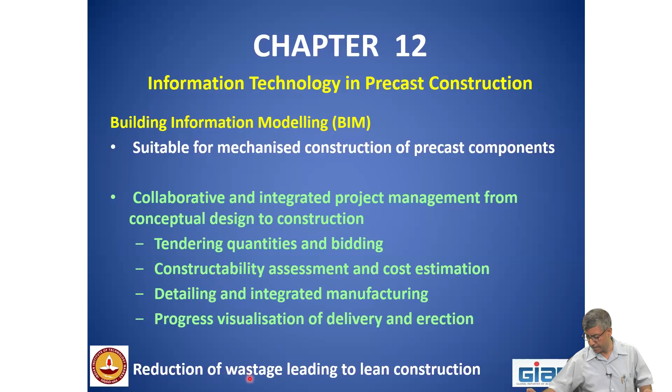Collaborative and integrated project management is possible through BIM, starting from tendering, constructability assessment, detailing, and progress visualizations. Our Professor Ashwin Mahalingam not only helps the state departments but also other parts of the nation, promoting the use of BIM, especially for metro projects. This also leads to reduced wastage, which leads to lean construction.

Now, there are softwares like Revit which can be used for precast construction. It also helps in change management—that means if an architect wants some change, that can be seamlessly integrated into this type of coordination.

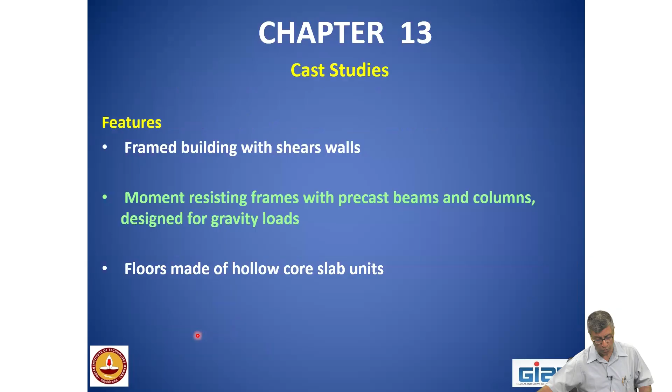Last comes the case studies, and these case studies are primarily related to frame type buildings, where we have moment resisting frames with precast beams and columns, and the floors made up of hollow core slabs. That means we cannot cover all types of case studies; only two types were covered here.

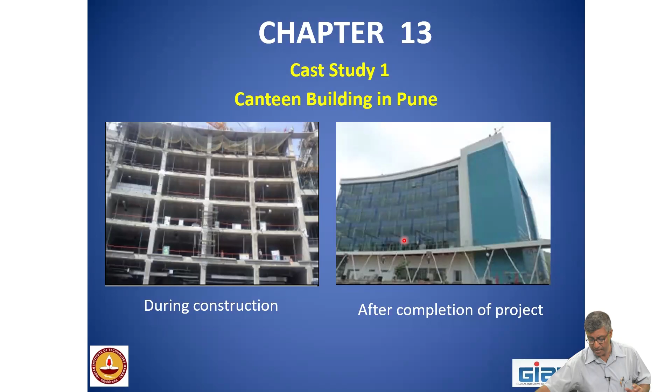This is a project for Infosys, where you can see the extensive use of columns with corbels, beams, and hollow core slabs. This is the finished building. I have scanned this from the handbook, that's why they are not very clear. These are the elements used in that building—emulative connection, you can see the beam elements, the column elements, the hollow core slab elements.

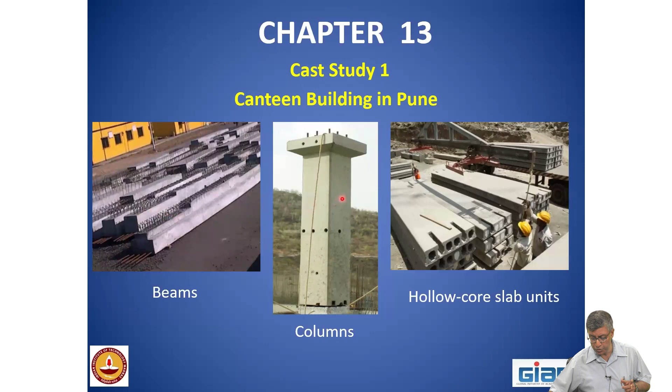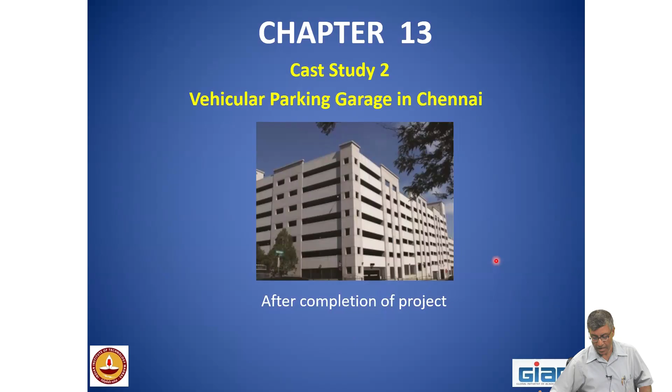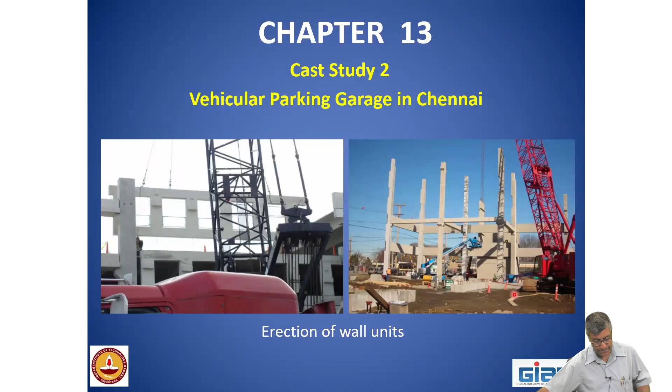To close, this handbook is a source of compiled information, but this is not everything. Each one of you, if dealing with a certain aspect, has to go beyond. There are explanatory notes and illustrations, and a list of references. The Indian Concrete Institute is Chennai based, and you can purchase this book. Especially for educators, please have a copy on your shelf so that at least you can tell the students that this is there.

Because in our country, what happens is people say we don't know. If I move from here to Delhi, they will say, oh, what you are doing in Chennai we don't know. That is very unfortunate—that awareness is not there of the documents that we have within our country, forget abroad. That's why I strongly urge that you have a copy of this handbook, which gives you the overall idea about precast. The price has deliberately been kept reasonable, so that even a student should not hesitate to buy it.

Typically, whenever there is an ICI convention, there will be a booth of the Indian Concrete Institute. They will be selling this, and apart from this, there are other documents also. Our department produced the document on industrial floors, which is also a very nice document, and there are some durability monographs too. Don't hesitate to purchase this, so that it is beneficial for your teaching.